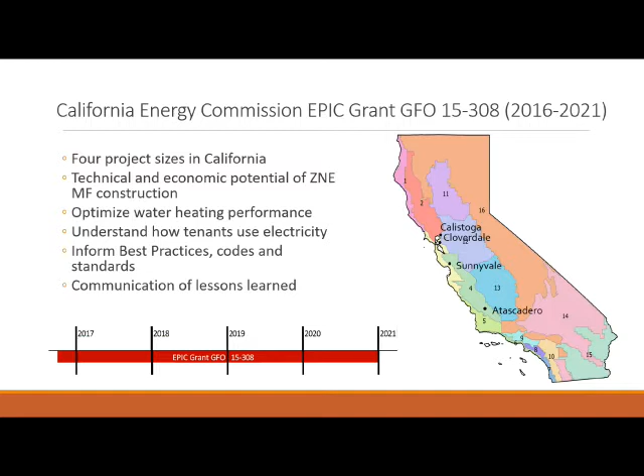The main goal of this grant was to assess the technical and economic potential of zero net energy multifamily construction, with a focus on optimizing water heating performance. A big part of this was also understanding how tenants use electricity, all to inform best practices, codes, and standards. And here we are today, communicating our lessons learned.

To talk about the data collection briefly, since it was a big part of this project, we did circuit and whole-apartment consumption monitoring with the Nexi devices — that's the glowing green device there. It had in-unit real-time energy feedback to the tenants. We also collected metadata like occupancy and unit information.

We performed energy models and took lots of photos and on-site observations. We also collected utility data from the owner and aggregated data from the tenant. We monitored water flows, pump power, domestic hot water tank flows and temperatures, took tenant surveys, and collected data on outdoor air temperature and in-unit temperature. Those are some pictures alongside it — installing equipment like the flow meter, and the bottom right shows inside the electrical panel with some of the monitoring equipment.

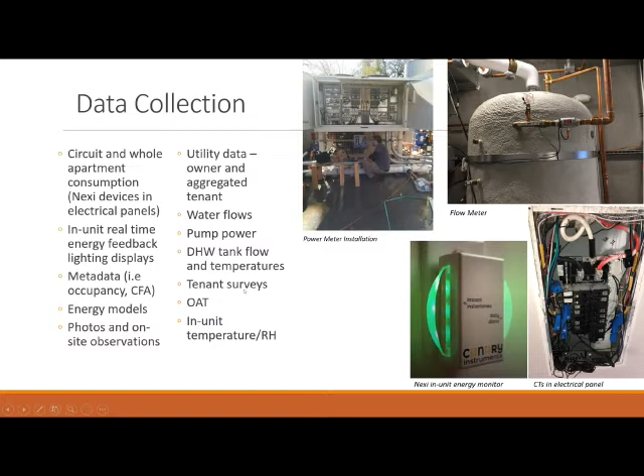With that, I'll hand it off to Meg to talk about zero net energy performance. Thanks a lot, Emily. I'm going to briefly talk through the 4 demonstration sites that Emily mentioned, and then give you a peek under the hood of how they actually performed. You can go to the next slide, Emily.

Calistoga and Cloverdale are lumped together, located respectively in Calistoga and Cloverdale up in Napa and Sonoma counties. Calistoga is a 48-unit multifamily site made up of 3 buildings, and Cloverdale is a 32-unit multifamily building of just 1 building. Both properties have a central 3-in-1 combination system, a 4-pipe system that provides domestic hot water, space heating, and cooling, hooked up to hydronic fan coil units in each apartment. Both properties have rooftop and carport VNEM PV systems, and all 4 of these demonstration sites are designed to be Zero Net Energy.

One quick thing on these two properties: Calistoga is a little bit older than Cloverdale, so it was designed, constructed, and operating before Cloverdale was. Lessons learned from Calistoga's mechanical system design and operation were used to inform the design at Cloverdale.

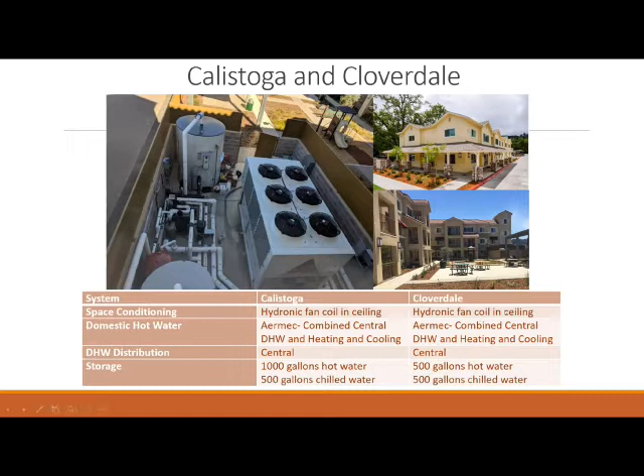The 2 buildings without the Aermec system connected, and the aggregation of all the tenants, all met net zero in 2018. The 1 building which the mechanical combination plant was connected to did not meet net zero, and that really drove the overall ZNE performance of the site. Then, due to optimizing or addressing system failures, changes were made to the mechanical system starting at the beginning of 2019 that resulted in a drastic increase in energy consumption, as demonstrated in the whole building data here. All in all, the site did not meet ZNE, but a lot of lessons learned came from this property to inform the next property at Cloverdale.

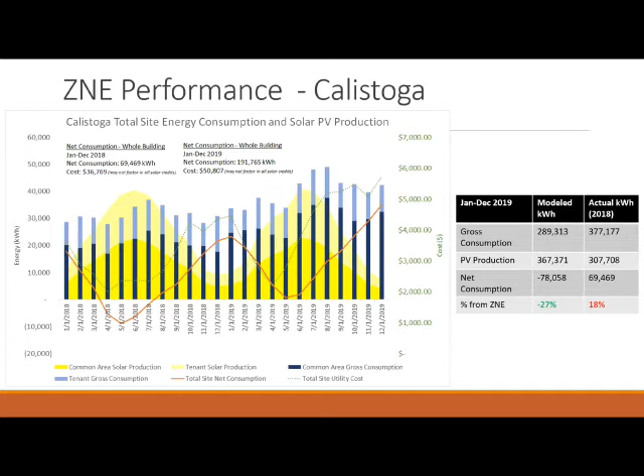The property in Cloverdale family apartments did in fact meet ZNE starting in the 12-month period starting in February of 2019. Looking from February 2019 to January 2020, that 12-month calendar year did achieve ZNE.

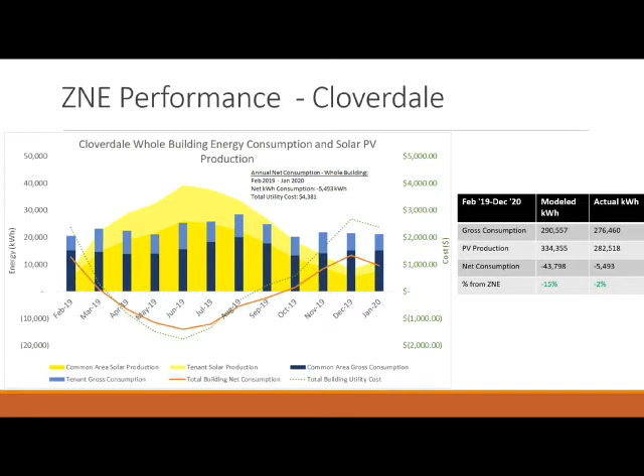The reason we're looking at this time period instead of the 2019 calendar year is because there was a pretty major issue with the solar PV system that we caught with the monitoring data, which I'll talk about a little bit later. But the performance of the property was still on track, and the performance of the PV system caught up with itself and was on track starting in 2019.

The next property is down in Sunnyvale, Edwina Benner Plaza. It's a 66-unit, 3-building multifamily property in the South Bay. They have a central heat pump water heating system that serves all of the units, and then each unit has a ductless mini split for space conditioning.

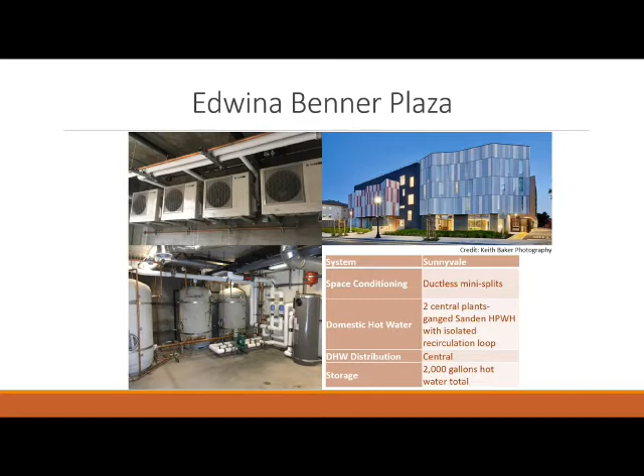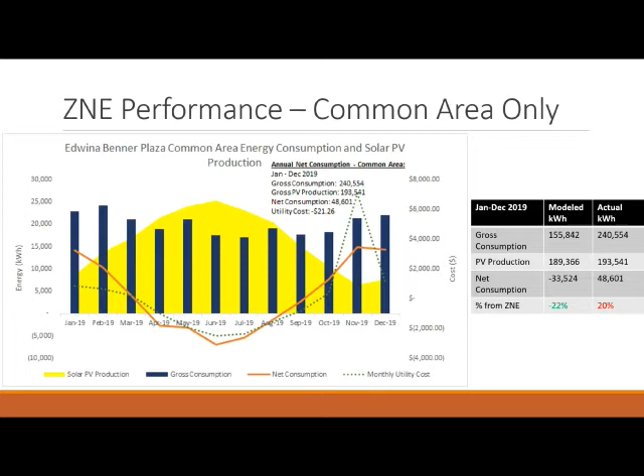Last but not least is Atascadero, a 60-unit building called the Knolls at Avenida. This property has 2 multifamily buildings that each have individual systems. They have unitary heat pump water heaters located up in a metal shed on the roof, which we'll talk about a little later, and ducted heat pump units for space conditioning, with compressors on the roof and air handlers inside the units. This property has a rooftop and carport VNEM PV system that serves both common area buildings and all of the tenants.

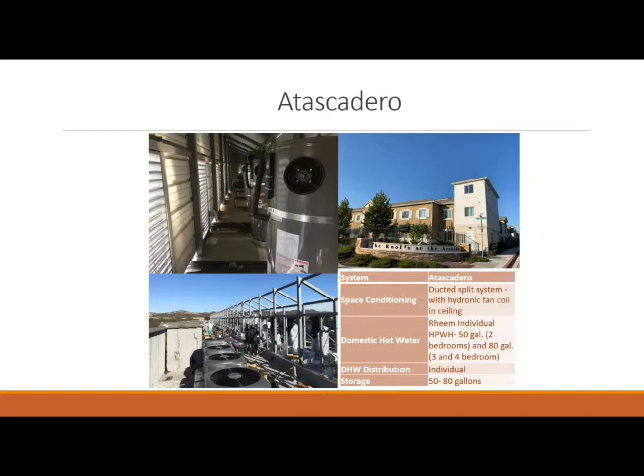And then just taking a look at the ZNE performance of this property. This property also did not meet ZNE in a single calendar year, again looking at 2019. You can see the breakdown between common area and tenant loads. If you look at them separately, the aggregated tenant loads did not meet ZNE, but got a little closer than common area loads alone. So when you combine them, the common area load is sort of helping drive that positive consumption over the course of the year.

We'll talk about this a little bit later when we discuss VNEM allocation. But overall, this is the performance we saw after monitoring these properties for 3 years and collecting utility data to look at whether the site met ZNE as designed.

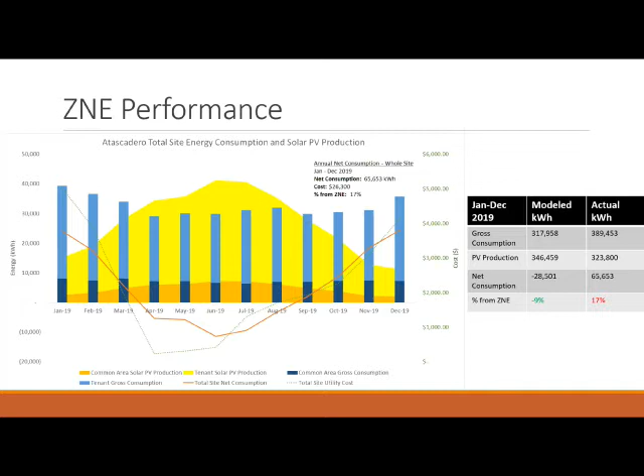And I'm going to pass it over to Amy to talk about some of the consumption side issues that contribute to ZNE performance and whether a property or building can meet the design ZNE goal.

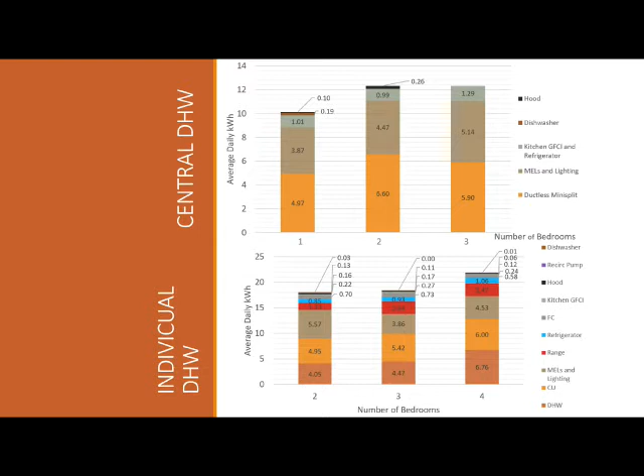So what I want to do is talk about a couple of different conditions. These next several slides are about Atascadero. In the slide previously, when we looked at the second largest load, it was the condensing unit, the outdoor unit of the split heat pump system.

As we looked at this load, we noticed it was pretty high, much larger than we expected from monitoring. Digging further into it, we realized there was a constant base load due to the operation of a crankcase heater, operating 24/7 whenever there was not a call for heating or cooling. That averaged about 3 kilowatt hours per apartment per day, and aggregated over the whole apartment complex, that's over $6,500 for an unnecessary load.

For those who don't know, the crankcase heater is used to warm the compressor oil so it doesn't mix with the refrigerant and damage the compressor. It's generally utilized for lower temperatures, and you can also have a delay in compressor startup to let the oil warm up, preventing that mixing after long durations of downtime of space conditioning operation.

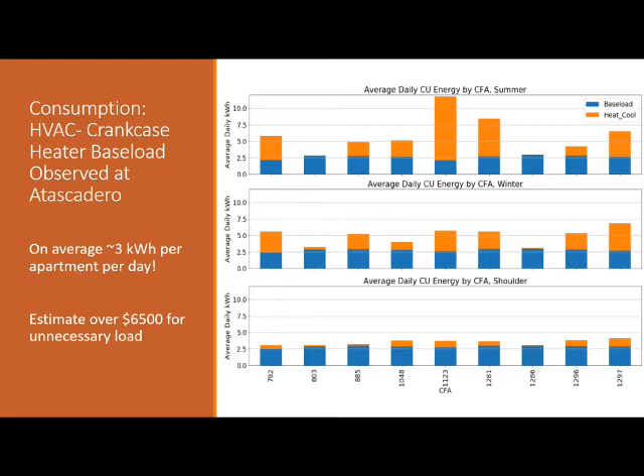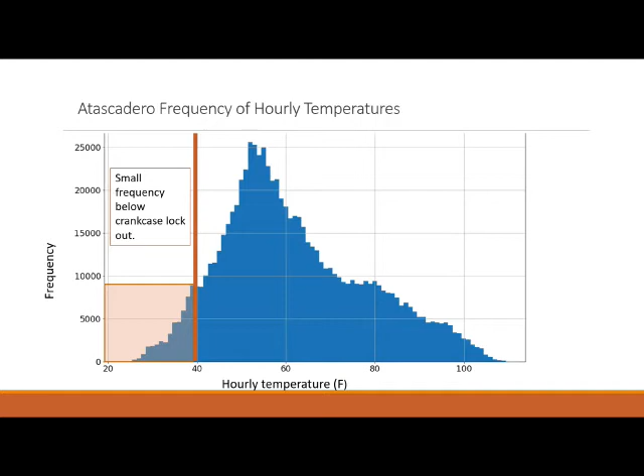But in terms of impact, this load was significant in preventing the tenant units from achieving ZNE that Meg was talking about before, based on their allocation. That's one issue.

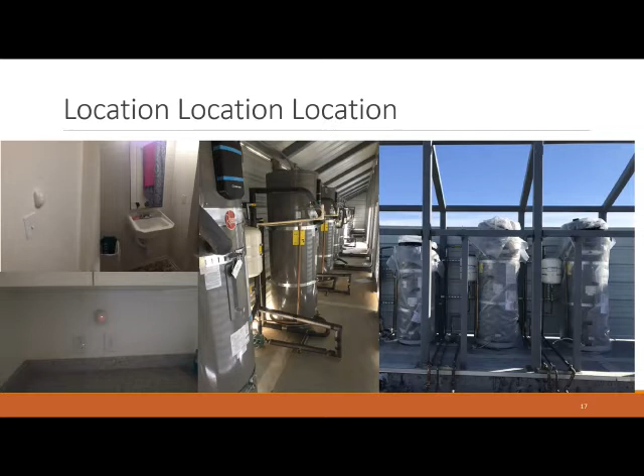The next two things are all about location, location, location. The left-hand picture shows occupancy sensors in the kitchen and bathrooms for the recirc pumps. The middle and right-hand pictures show the location of the individual Rheem heat pump water heaters, up on the roof—you can see it before it gets framed in with metal siding panels. Needless to say, that was quite chilly in the winter in there. But these two install locations had a performance impact on both of these end uses, so I'll show you what that looked like.

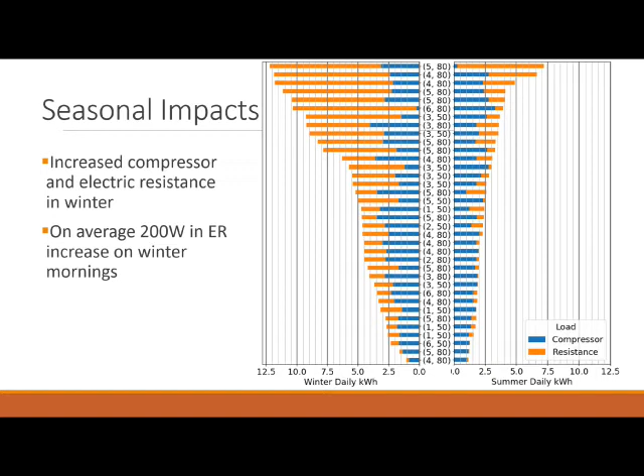We're running water, pulling water off the tank through the recirc loop and bringing it back. It's warmer temperature, disrupting stratification, and we're getting heat loss off the tank for no use.

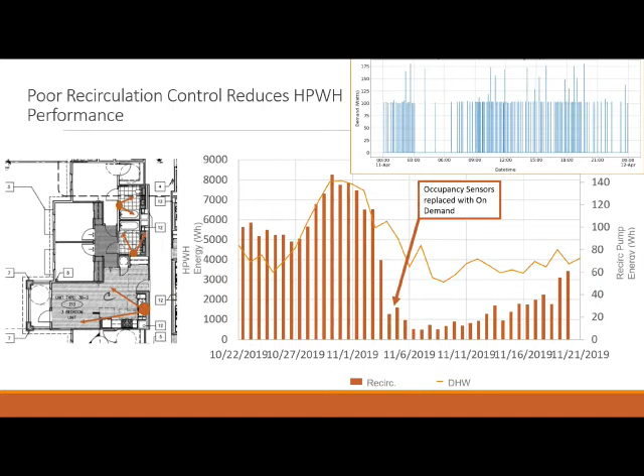Okay, so those are two big things we called out in the Atascadero project that had the individual systems. I want to talk briefly about central systems. This is the Sunnyvale project Meg was talking about with the modular Sanden central heat pump water heater system.

But this would not have occurred if there was not significant technical assistance, oversight, and verification in the field. First, there were challenges in terms of right sizing straight out of the gate at the design phase, where we needed to make sure we were prioritizing storage because we're moving from a gas system to a heat pump system.

We also had to identify what we were sizing for, and really determine that low medium demand was the right fit for multifamily. Looking at the EcoSizer system, that low medium demand was good -- it gave us enough coverage without too much buffer, a safety net in terms of sizing demand.

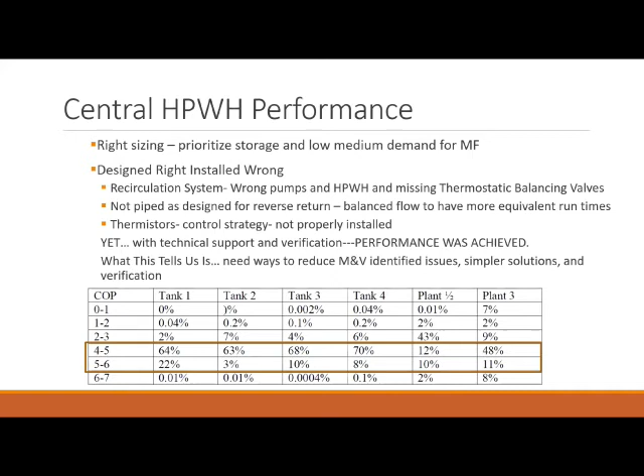Next slide, please. So I've talked about some challenges and opportunities. But the thing I wanted to close out with, before I pass it back over to Meg to talk about production, was really that we can look at some consumption reduction strategies or opportunities.

And really this is all about thermal storage. I know a lot of folks are thinking about this, investigating it, trying it out. So we looked at it both in the individual as well as the central systems.

Overall in the individual systems, we definitely want more volume. We want to size the volume of the water heater and the set point to reduce potential resistance use, because we want to create as much warm water with a heat pump as possible. So for us, out of 8 experiments we did with 22 heat pumps, we found 140F with heat pump only mode achieved that.

But this was also because some of our experiments weren't as successful as we would like because of the proprietary mode configuration and logic in the Rheems. We were doing a lot of testing with energy saver mode, which really ended up triggering a lot more electric resistance than we desired, so they were not as productive or successful as we anticipated.

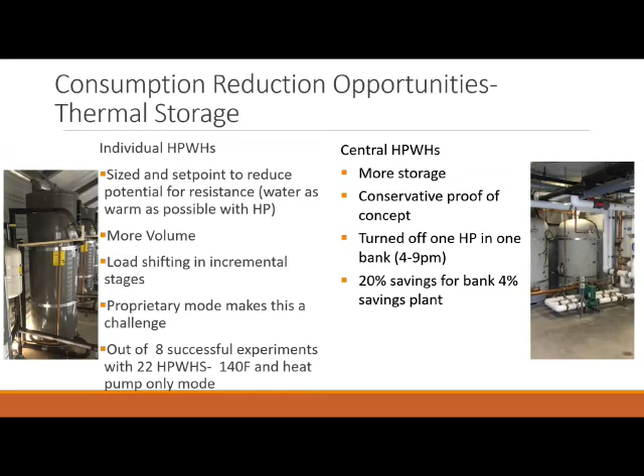Great, so with that, I'm going to turn it over to Meg to talk about production.

Thanks, Amy. So just as there are unforeseen challenges or unforeseen loads on the consumption side, the same goes for the production side—different production, energy production outcomes than was modeled or predicted in the design phase. You can go to the next slide, Emily.

So here are a couple of main categories of discrepancies when looking at PV production, or the PV component of zero net energy, from the design phase to the operational phase. One main discrepancy between modeled and actual is that the PV system does not perform as expected—it falls short of modeled annual energy production, and you don't see as much production to offset the building loads or consumption. The other main category, a really interesting finding from monitoring at these properties, was that PV credit within VNEM systems is not actually allocated to align with the different meters' consumption for which those credits are allocated.

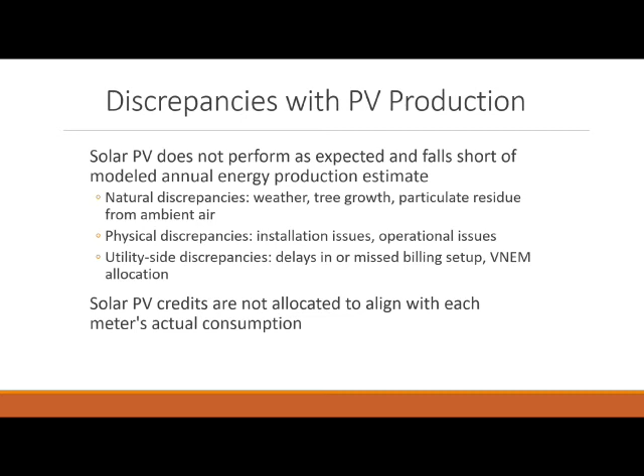Year by year, there are variations in weather and natural events or disasters that can overall reduce the solar access to a site or to a PV system. So this is what I've categorized as naturally caused discrepancies. Some ways that solar access can be reduced are just by variations in weather year by year—you might have a more rainy year than average, and therefore more cloud cover.

There are also specific weather or natural events that might reduce solar access. We saw one, which I'll talk about in a bit, this past September, when the sun was blocked out in the Bay Area just a couple days after the Creek fire started. Another is shading from tree growth—it's hard to plan for or anticipate how a tree will grow and where shading will increase over time. Shading is taken into account during the design phase, and a SunEye might capture how shading will change, but it doesn't always capture the whole picture. And then lastly, there's residue from either natural events like a fire event or agricultural events—if a system is installed near agricultural sites, there's a lot of dust in the air.

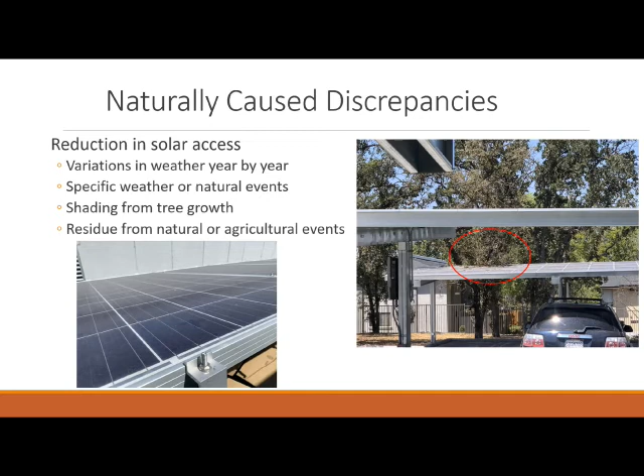The next sort of production discrepancy can come from physical or installation issues, and there's a wide variety — I don't want to say infinite, but potentially infinite number of things that can go wrong in installation and operation of a PV system on the physical end.

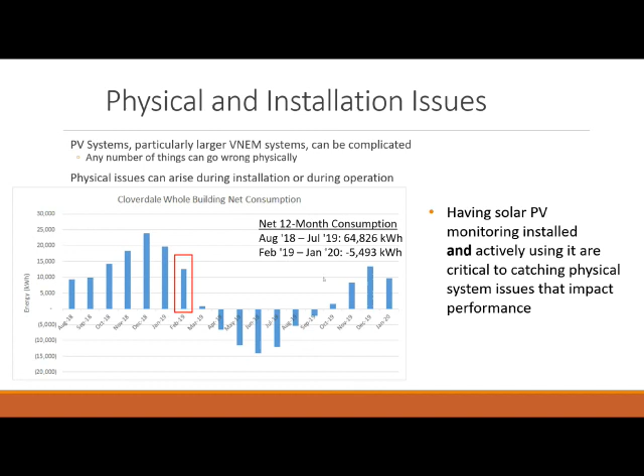Lastly, on the production discrepancy end, there are what I've called utility-side issues — billing and interconnection issues. We saw one of these at the Cloverdale property, where the solar credits were not appearing on the bills. The PV system was interconnected in November 2017, and that system was operational and producing energy, sending it back to the grid to offset bills at the property from November until July. But that's not shown in the utility data because solar billing was not set up.

Utilities have said it can take up to 6 months for solar billing to be set up, so there's a bit of a lag or delay period. But in this particular instance, it was actually missed, and there were 8 months for which production was happening and not showing up on bills. Once we saw this in the utility data, we were able to engage the utility, and solar billing was set up. Another problem from this is... but luckily the utility was willing to retroactively credit for all of the production that occurred back to when the system was turned on.

But particularly in the affordable multifamily housing space, it's good to get those credits, bill credits, and savings. But at the same time, residents and building owners have bills and expenses due now, in the present. So missed credits, though they might be received later on, are still very problematic.

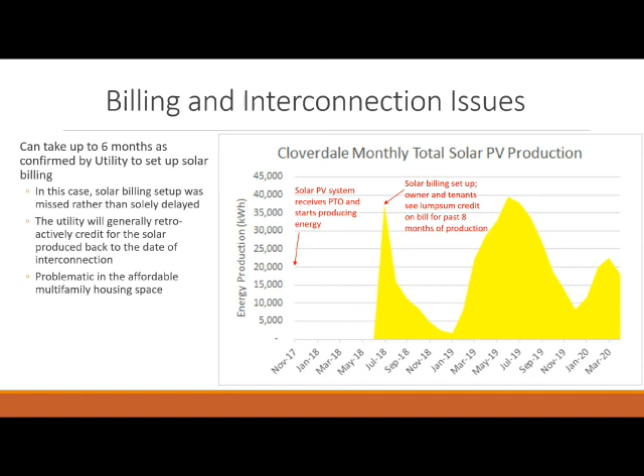But as I mentioned at the beginning, the VNM allocation can also be a big determinant of meeting zero net energy, particularly from a cost standpoint. Here's an example from Atascadero, where the VNM allocation was very misaligned with the actual meter consumption on the common area meter. So you can see one building was able to meet ZNE, whereas the other building was not, and you can see how that played out in reality.

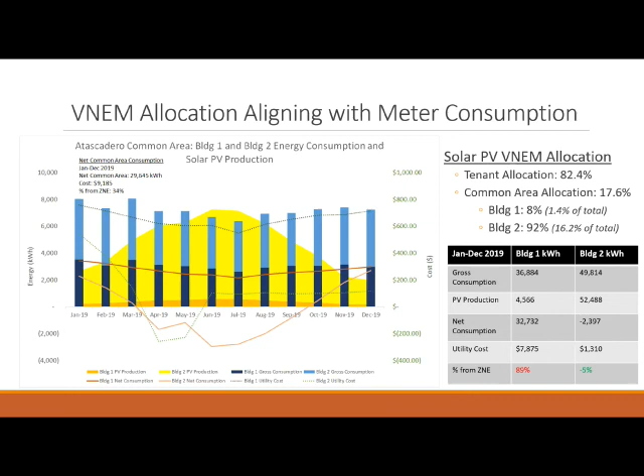And from an aggregated energy consumption standpoint, you might still be able to meet zero net energy, but from a cost standpoint, that misallocation of credits will actually increase your costs, where you might have had lower utility bills otherwise. So that's a quick summary there, but I want to pass things off to Emily so she can touch on the modeling side of things.

I'll just go really quick through this so we end on time. What I was going to talk about is we had two different ways of looking at the modeling side of things. One was from our initial ZNE sizing, from Redwood Energy's perspective. We used different tools to come up with a ZNE estimate, but the main takeaway here is no modeling tool is perfect, and there are loads that aren't represented in the software.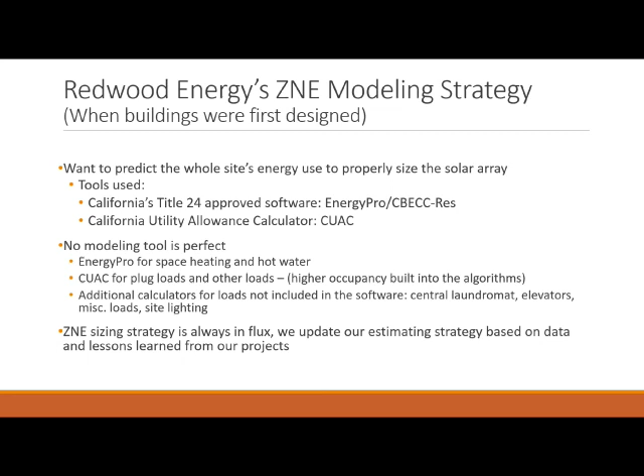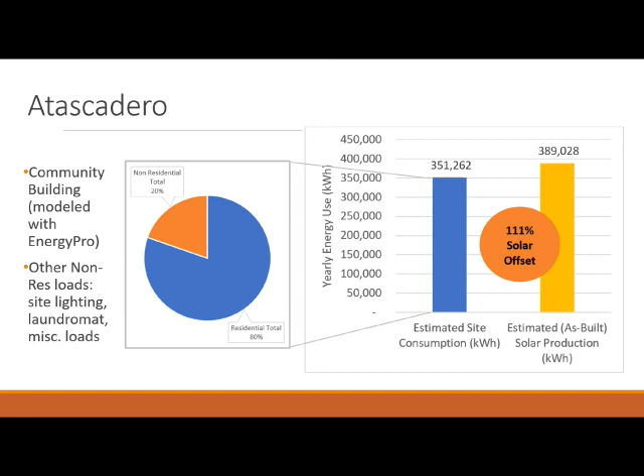So for example, at Atascadero, our estimated site consumption, we had to add in laundromat loads and miscellaneous loads to come up with a better estimate. And looking at Calistoga and Cloverdale, Meg talked about this a little bit -- we used Calistoga's data to inform Cloverdale. Originally, our first estimates oversized the solar array, but when adding in the new data, it ended up more closely offsetting instead of oversizing the solar array -- more closely matched to the predicted loads there.

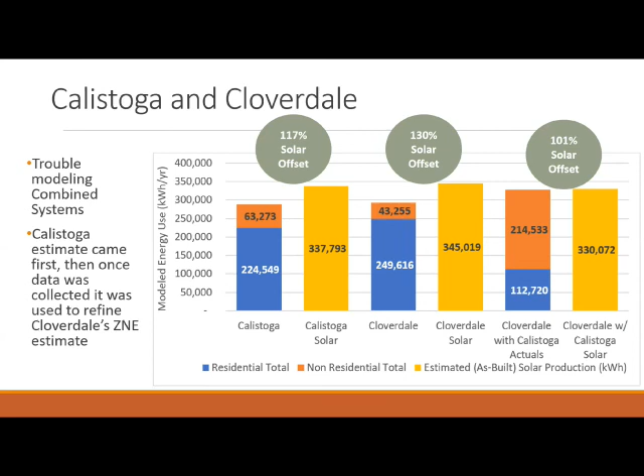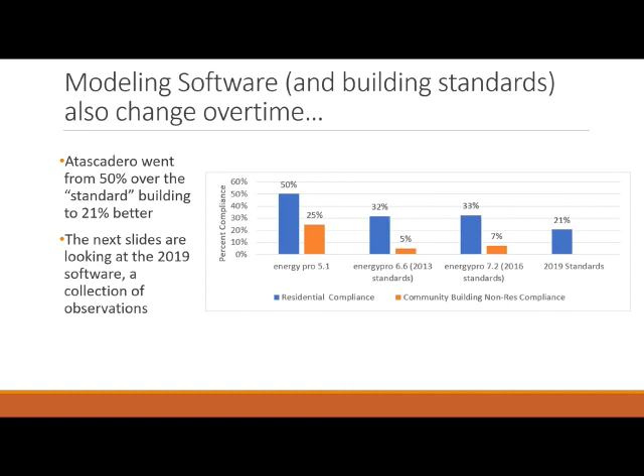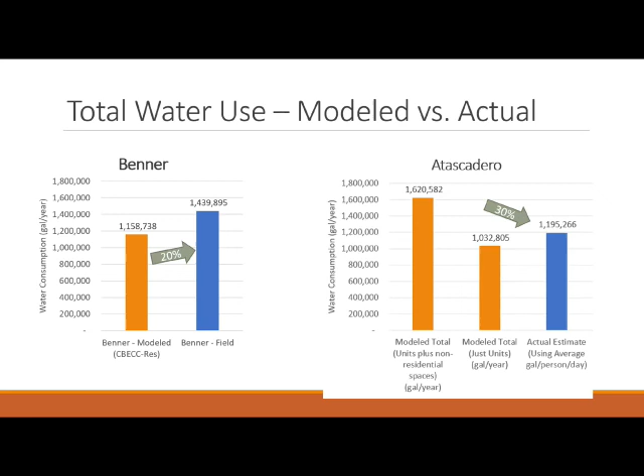That's Cloverdale again. From another perspective, we looked a lot at the 2019 software -- feel free to email me if you have questions about this. We looked at total water use, and there are some discrepancies there between models. Since we were so focused on hot water, our domestic hot water systems, we looked at total water use and the draw profiles pretty closely as well.

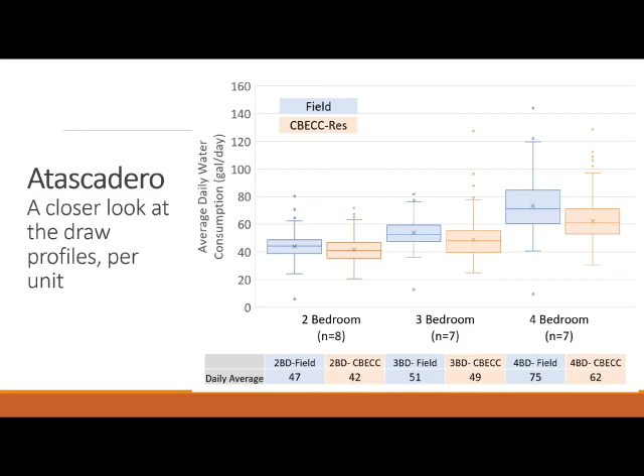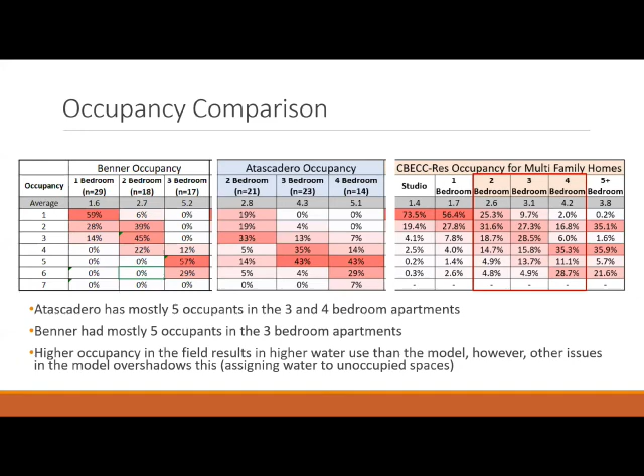Main takeaway: the occupancy assumption in the software is lower than what we observed at our projects, because our projects are affordable housing and the algorithms are based on market rate housing. I'll just skip over these to get to the end here.

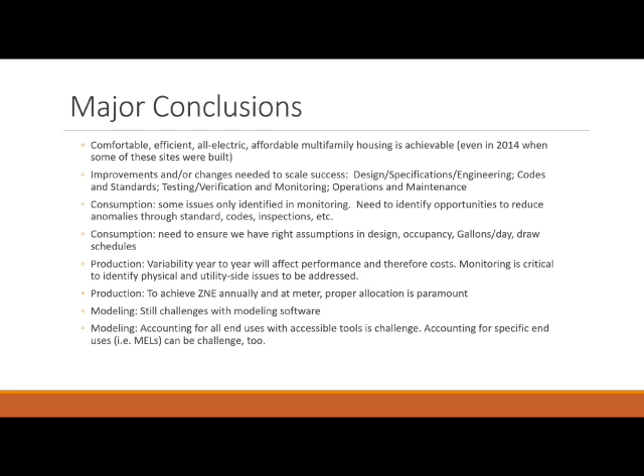So you can look at these conclusions later. But I want to go to the next slide, Emily.

Coming soon near you will be our final report, case studies, and technical briefs on this research project. You know, final reports for CEC, we'll have that, but we're also pulling out deep dives into the modeling that Emily just breezed through in these last few minutes. Some of the stuff on thermal storage or PV that Meg was talking about, as well as domestic hot water systems and crankcase heaters. So we'll have these technical briefs taking deeper dives into these topics, and we'll have case studies on a couple of projects. Those will be coming soon in the next couple months. So if you want to talk with us, we're happy to talk about it.